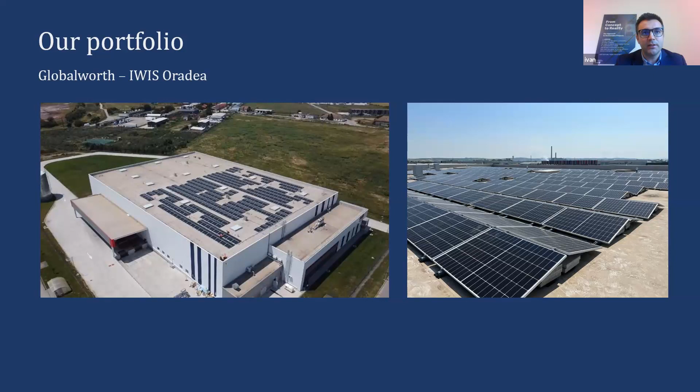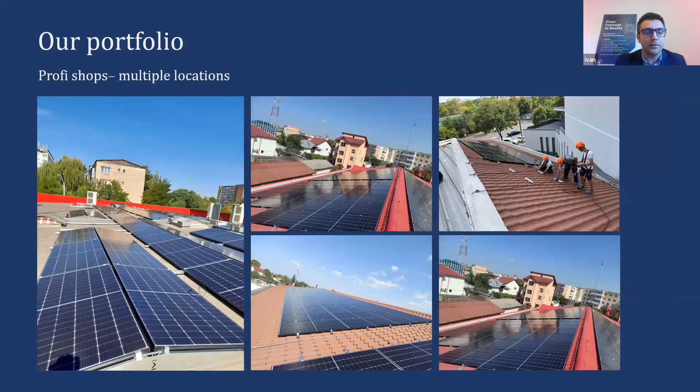This is one of the projects for our clients that had two objectives actually: reduce the costs and reduce their carbon footprint. It's a factory in the western part of the country, and they had a clear objective of reducing both cost and carbon, and this is how they did it. And our typical clients are clients with rooftops that have big consumption under the rooftop. So retail, like here some Profi shops that we just finished installing, and some other projects in different kinds of industries. But the trend is happening in all verticals, I would say. It's happening in manufacturing, in agro, also in retail, of course, and real estate, as the built environment is, as I said, responsible for 40% of the emissions.

Now I will share with you one interesting and inspirational movie. I hope you will hear the sound as well. Let me know if you don't hear the sound. I stop now because we don't want to hear this commercial. But bear with me until we get the movie. So now we have it. It seems there is no sound, but we see the subtitles. It's fine. Okay.

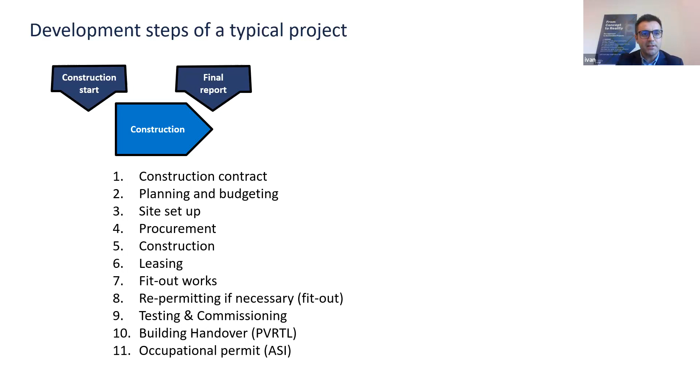Good. And then, let's say we completed the project, and then we need to appoint the people that will take care of the project, which is the property management and the facility management company. That's the moment of building handover. They are becoming responsible for operating the project. The lease commencement starts, like the tenants in case of an office building, or in case of a residential or public building, the users of the buildings. Business activity is ongoing, and then for the next 6 months, I would say there are fine tunings and small reparations and adjustments that need to be done for the building. Of course, with the maintenance and repairing plan and customer care program.

The divestment, it's a really important one. If the mission of the project is to be divested at the end of the construction phase, then you need to have clear steps with the internal due diligence before doing the external ones, because the investor will come with his team and will perform a due diligence. And that means that you might not be prepared to solve the red flags, the observations from that due diligence, because any investor will scan, will try to identify all the risks related to the project. It can be permitting risks, construction problems. It can be operational problems, that the building is not working according to the specs. It can be legal or financial, not clear contracts with tricky companies, and so on. All these are scanned, are checked by the investor.

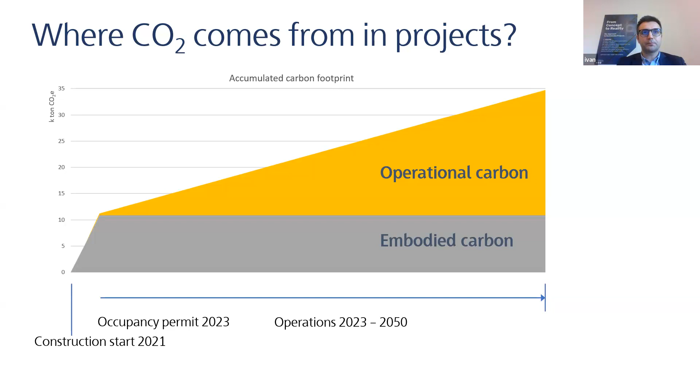Because at the end of the day, I'm pretty sure that all the projects in the future will have something like this, called life cycle assessment. We can see this one on all the appliances we buy at home, fridges and so on. I'm pretty sure, because it's happening already, that we will see them on the buildings.

So then we need to make sure that we have not only the energy certificate of the building, which is mandatory in any case, but also the life cycle assessment of it, and to get the number of carbon emissions equivalent per square meter. This is a really important differentiator in the future for a building to prove that it's sustainable or it's not sustainable.

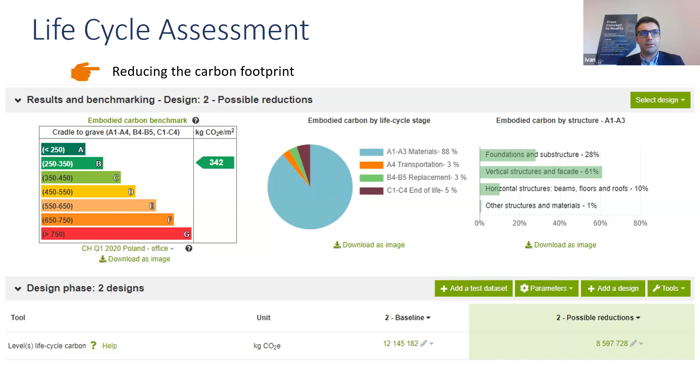And typically there is a software used for this one, and I recommend it to the students or the colleagues in the beginning of their career. This is something that will definitely grow as a demand from the market: specialists that will need to do these life cycle assessments. There are only a few now, but the energy experts and auditors are also getting this competence within their teams to be able to deliver such analysis.

The software that we are using is One-Click LCA, by the way. It's used by Nordic governments and some Western ones as well. Not yet in Romania, in this part of the region, but I'm pretty sure it will be soon that the governments will need to use this kind of software to analyze the built environment and have it clearly measured, not only rough estimations, because this tool gives you clear results, data about both embodied and operational carbon footprint. It screens, based on the bill of quantities that you have on the project, how much the carbon footprint is.

And I want you to remember that up to 70% of a building's total embodied carbon is coming from the structural elements. In Romania, we also have earthquakes, so we design massive elements. And that's why we have 70% coming from concrete and steel. Around 40 to 50% is from concrete, and 30% is from steel.

Simona is asking, what is the name of the program that calculates the carbon footprint? That is One-Click LCA. You just Google it. It's a guy from Finland, Panu Pasanen, who is the owner of Bionova. Bionova is the name of the company. And then you can try it; they have good tutorials. They also do some trainings online, and it's a really easy tool to use.

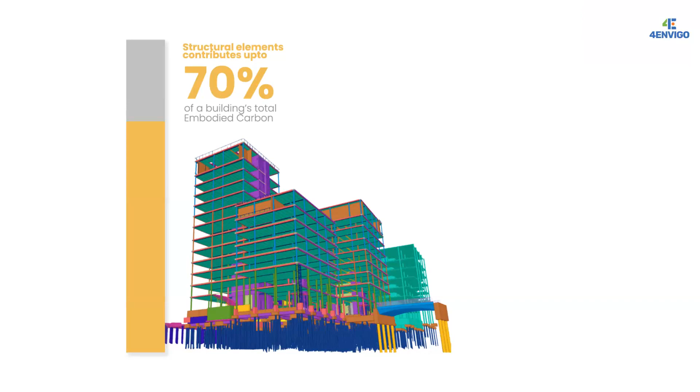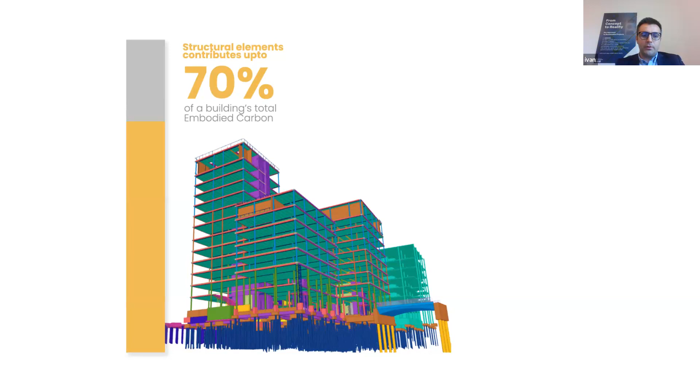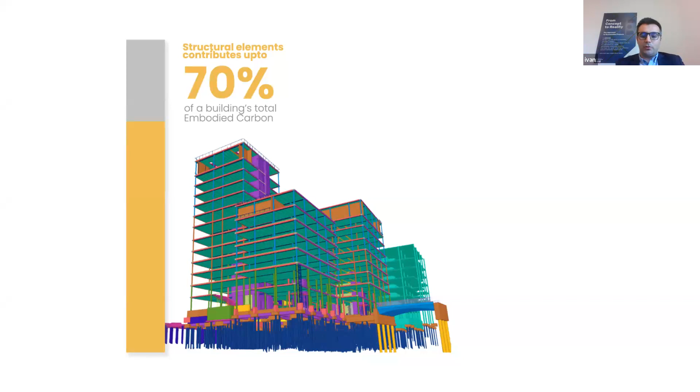Simona, you said you are an architect, if I remember correctly. Yes, that's correct. Yeah, so especially for architects, it's a really powerful tool that you can use while discussing with your clients in the initial volumes, when we do the schematic design and try to see what's happening with that project. You can give them really instant data with a module called Carbon Designer. I think I have it in the next slide.

So you have this baseline in the design, a CO2 emission simulation baseline, and then you do the phase-by-phase assessments. But the main thing is, if you have, for example, Autodesk, like BIM 360, it works well together. You can connect. If not, you can have the bill of quantities exported in an Excel file, and then from Excel you can introduce it in One-Click LCA. So it's a pretty friendly platform.

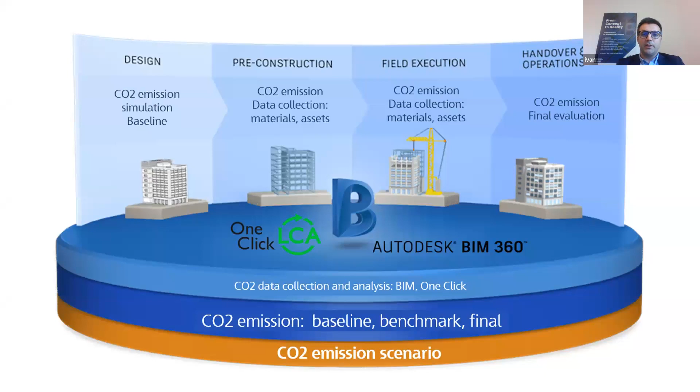And then, as I'm saying, concept design is really the area, together with detail design, where you can bring the most added value to the customers: how much carbon you can save. And when I say carbon, I'm thinking also about cost, because carbon is cost at the end of the day, both embodied and operational. So the more materials you can reduce from the concept design, the more you are able to reduce the carbon footprint. So keep in mind that this is a tool that you can use with the customers to optimize the project itself.

And here there are a lot of discussions with architects, structural designers and MEP, because it's a change of mindset from the main focus that we had for many years, that the project should be really nice and welcoming and have all of these kinds of elements. Today, that's still important, but it's becoming more important to be sustainable. And being sustainable means that we need to have proof points on reducing the environmental impact of the project.

And then, once we do the good homework in the concept design, we go to the detailed design and get a more accurate bill of quantities. And based on those, we can see each element, like foundation, substructure, vertical structure and facades, horizontal structure, beams, floors, and roofs, and then you can optimize bits and pieces here and there. And then you have the construction of the project, where you can be more sure about the level of the certification. Is it A, B, C, whatever? If you are able to get to around 300 kilograms CO2 per square meter, that's a really good project.

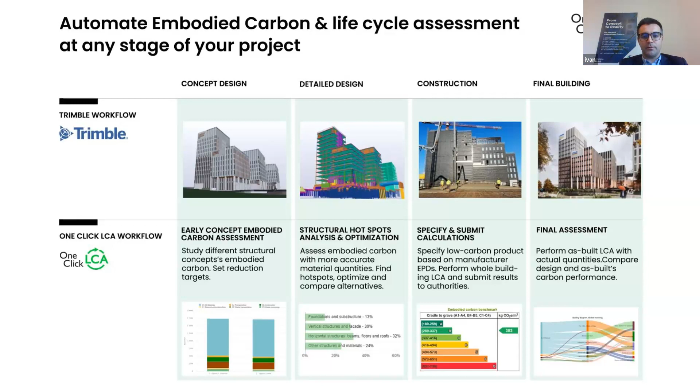Because at the end of the day, this is mandatory, and we have in the audience some experts in circular economy, as I saw. So for me, it's really important to see more and more of a shift to the circular economy, from building a project without taking care of what's happening while we build it, after we build it, and after the lifetime of the project. Because it's mandatory today to make sure that we develop the markets for recycled material, and of course only legal requirements will change this. It can be a differentiator for the developers, but it's mandatory to have it as a legal requirement.

We can then design better products, reduce the process waste while producing, optimize the life cycle through alternative consumption, when we talked about different kinds of solutions to reduce the energy consumption, promote reuse. It should be more and more that we will need to buy reused materials, and not only recycle but upcycle as well. Improve collection, encourage recycling, and then invest in infrastructure and close the loop. So it's around these three main areas that I'm organizing my thoughts around circular economy.

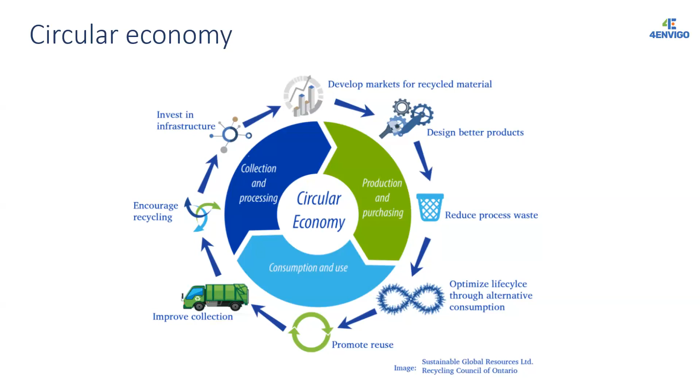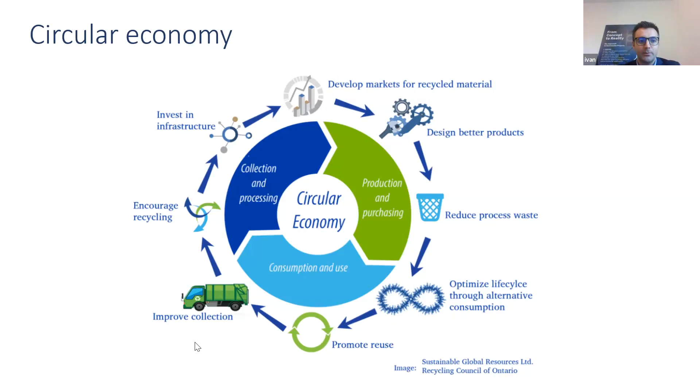Okay, I hope everybody's back, so then we can start slowly but surely. Are the slides still on the screen? Anastasia, you're the only one with the camera on. Thank you very much for confirming. So then we should go further.

Let's see. This is one of the checklists for the engineers to start digging at the beginning of the project, together with the architects and MEP designers and structural designers as well. The LEED certification is a really common certification scheme in Europe and in the US as well, and it's giving you some scoring. Based on the scoring, you can get just a certification, which is not saying much. And typically, there are no projects only certified, because that's like having a score at school below 5.

So certified is only between 40 to 49 points. Silver is between 50 to 59 points. And then you have gold, which is the majority of the projects that I know, from 60 to 79 points. In gold, you see also some advantages in cost reductions with energy. And also platinum, which is, let's say, the leading kind of projects.

Inspirational projects, and they gain from 80 to 110 points. And here they are splitting the credits by these categories: sustainable sites, water efficiency, energy and atmosphere, materials and resources, indoor environmental quality, innovation and design process, and then regional priority credits. These are the categories, and then based on your project specifics, you can choose to target some of the points with yes.

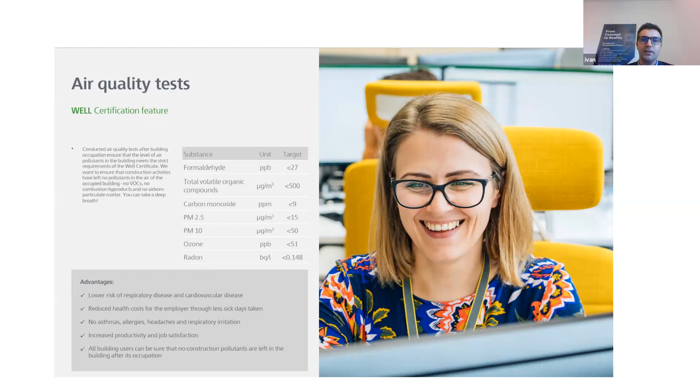We have a problem in Bucharest mainly with PM 2.5 and PM 10. It's quite a polluted city, I would say, that we live in. It's becoming more trendy to adopt the solutions of air filtration at home, not only in the office. Office industry was the first one to tackle this one and have good filters, MERV 13, 14, that were able to reduce up until 98%, or even 99 in the dust spot efficiency. But this is with the high-class filters. This is the categories of filters, for example, MERV. We use 13 to 16 for offices. And this is how you get.

And then we talk to the users of the building. And it's funny situations usually that most of the tenants, the users of the building, they want to have openable windows. And then we try to explain that if you open the window, not only that you lose a lot of energy efficiency because of heating or cooling, depending on the season, but you get also all the unfiltered polluted air from outside. It's something that is still happening. It's a lot of awareness that needs to be raised, but as a recommendation, it's always better to make sure that you have good air quality filters inside the building and without using the openable windows.

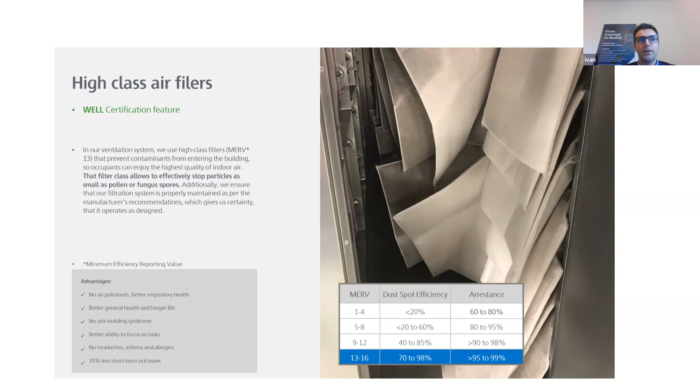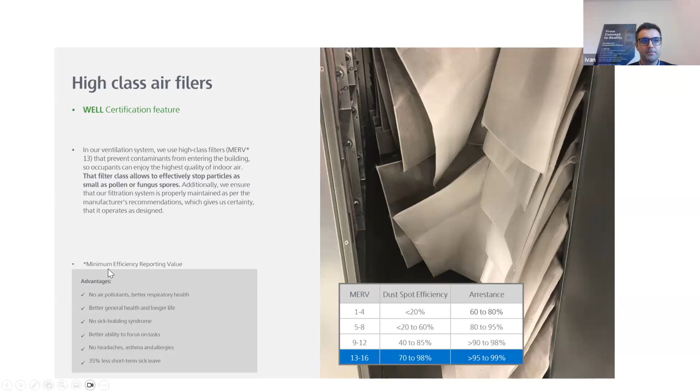Of course, if you have a location in the forest, yes, definitely you can use the openable windows or mixed mode ventilation and so on. But in polluted cities like Bucharest, then it's mandatory to have this kind of solutions. Good. Not stopping here, we also need to take care about the pesticide management. Managing a sustainable project means that you need to take care also about biophilia, and then you need to make sure that you use the proper chemicals to keep the healthier air. So no evaporation of substances into the air, and less use of chemical substances that positively influences the natural environment. That's really, really important. And it's something that is, I would say, better managed in the last years.

Do you remember when we had our parents or grandparents using that kind of sealant for the wooden floor, the parquet? That heavy smell that is giving you headaches. That's something we don't need, because that's a substance with high volatile organic compounds, and it's something that should be forbidden from my perspective. Should be forbidden in all the projects.

Now we have technology, we have materials with zero VOCs. So it doesn't make sense to postpone the decision of looking for zero VOC paint or whatever other material in whatever project you are investing your time and energy. It can be, again, office, residential, doesn't matter. There are solutions today with zero volatile organic compounds. And that's something really important to remember.

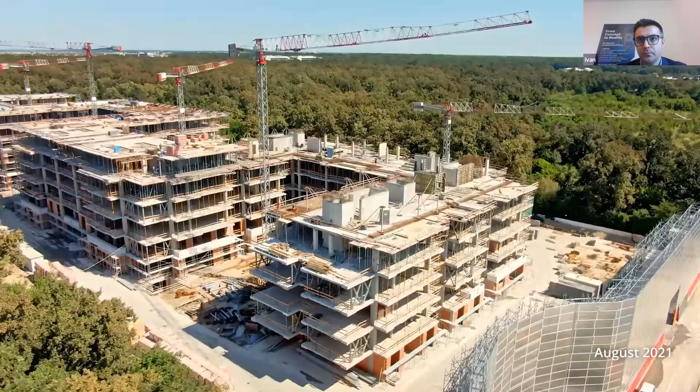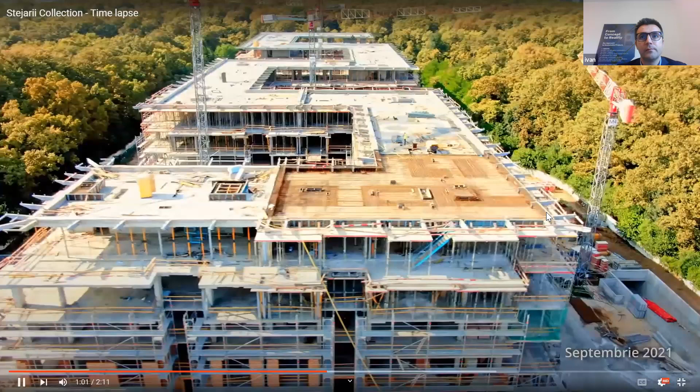This is one of the few projects in the forest.

So the reason for sharing this one is that it's an inspirational project, because they had from the beginning the mission of having a sustainable project, not only through the location and the quality of air around the project and the community, but also the energy performance.